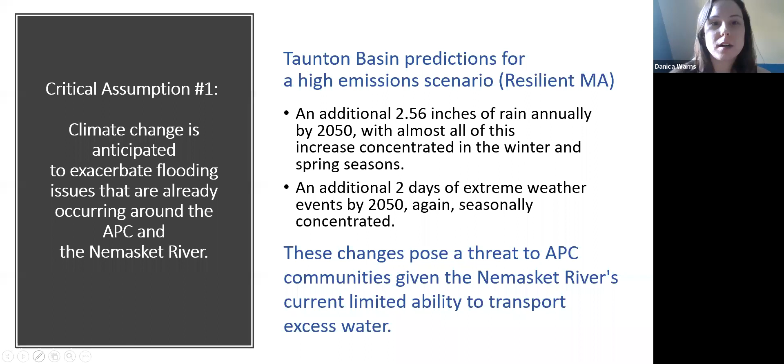So as we were developing this plan and working on prioritizing and advancing those projects that Michelle alluded to, we had a few assumptions in mind that were guiding our process as we were reviewing projects. And the first was that climate change is anticipated to exacerbate the flooding issues that are already occurring in and around the APC and the Nemasket River.

We used climate projections that we kept in mind as we were identifying solutions from Resilient MA, from their high emission scenario predictions for future climate. For the Taunton River Basin, those projections show an additional 2.56 inches of rain annually by the year 2050, with almost all of this increase concentrated in the winter and spring seasons. Plus, we're also likely to experience an additional 2 days of extreme weather events by the year 2050, and again this is expected to be seasonally concentrated.

And these changes pose a threat to APC communities, especially given the Nemasket River's current limited ability to transport excess water, which is exacerbating and will continue to exacerbate the flooding issues that we're already seeing.

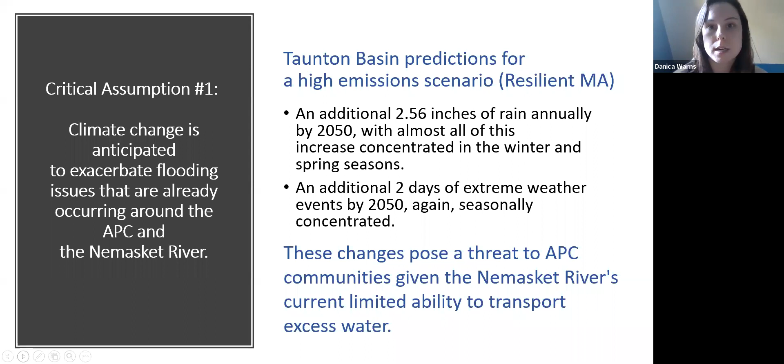The second assumption we had in mind as we went through this process was that the implementation of recommendations developed in previous plans has largely not yet materialized on the ground. There have been many studies of the APC over the years since the 1980s, and they have a great deal of historical knowledge and recommended solutions to a lot of these issues, but not many have been implemented to date.

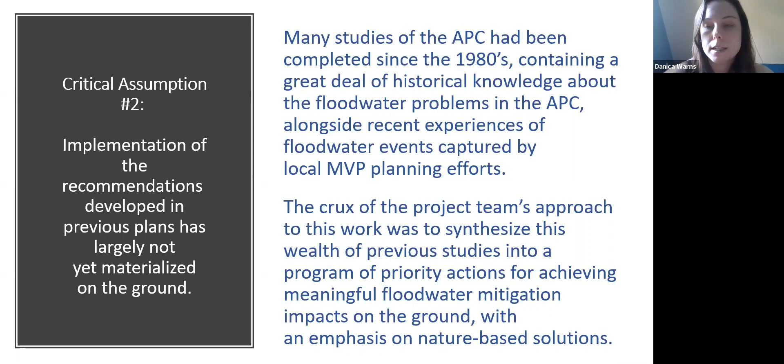So we really tapped into that existing knowledge set as well as more recent solutions identified in local MVP planning efforts. What we did for this project was synthesize this wealth of previous knowledge as well as the more recent knowledge, and tapped into the expertise of the Assawompset Pond community, who have a lot of that on-the-ground knowledge of what's currently going on. We used that to develop a program of priority actions for achieving meaningful floodwater mitigation impacts on the ground, and we looked through all of these with a lens of nature-based solutions. So next, please.

The final assumption we had in mind was that a holistic approach to floodwater management really includes combining both nature-based solutions, which we like to refer to as green infrastructure approaches, as well as traditional gray infrastructure approaches. You really have to have a good mix of both in order to have the greatest impact.

Now I'll tell you a little about the difference between those two solutions. Gray infrastructure, as I mentioned, are the more conventional engineered solutions that often come to mind when you think of infrastructure, like dams, stormwater pipes, and sediment traps. Often the approach with gray infrastructure is to capture stormwater and pipe it away from the source in order to be treated and dealt with far away.

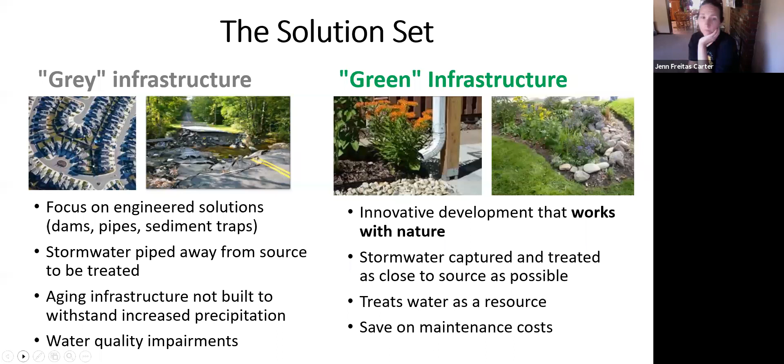Again, as I mentioned, for this project we really looked at a combination of both approaches that would have the greatest impact to reduce flooding across the watershed.

Nature-based solutions, as I mentioned earlier, really focus on green infrastructure—protecting nature and the services it provides, and as we develop and construct, incorporating these green infrastructure approaches into the way we do it. Nature-based solutions protect, restore, and/or manage an existing ecological system, or mimic those natural processes. They support public health and clean water, increase natural hazard resilience, and sequester carbon.

As I mentioned, you do that at three steps. Before development, you want to protect as much of what's there as possible. As you develop, you want to manage the existing processes through low impact development, which is another term for a way of developing that incorporates nature-based solutions and green infrastructure. And in already developed areas, you focus on restoring damaged and destroyed ecosystems.

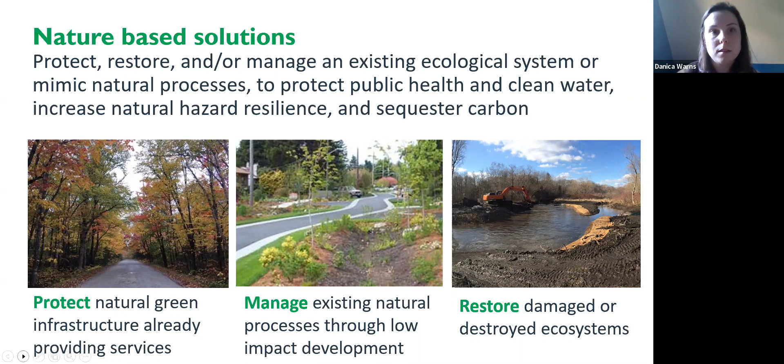In a lot of our work with communities, we found that most municipalities and communities in general are open to these types of green infrastructure and nature-based solutions. However, they're unintentionally discouraging them through local zoning, bylaws, and regulations, because a lot of local zoning bylaws require larger lots and are strict on dimensional requirements, which results in more impervious surfaces that prevent stormwater from going back into the ground.

I won't go into each of these too much because I want to make sure we have time to get to the projects, but in general, a lot of local zonings are not allowing or encouraging the more innovative approaches we really want to focus on if we want to use nature-based solutions.

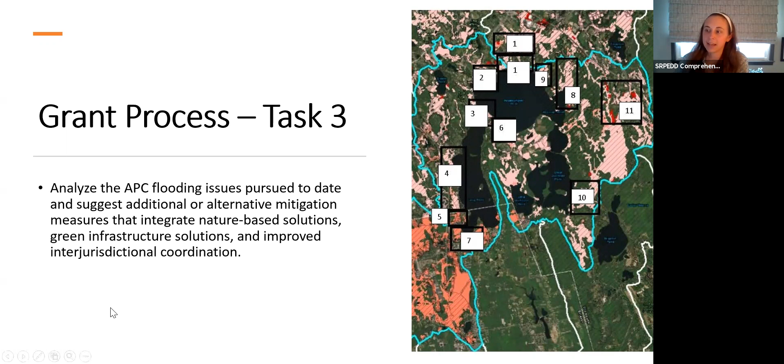As I've come to find out more as I do this work, you have a desired goal, say you want to improve a channel, but you have to do all this legwork in the back end to vet those solutions with the community, to study the feasibility, design and engineering. There are so many steps to many of these processes that we wanted to figure out where are all of these in that array of steps, and how do we get them to the next

tier of that ladder? So the final task involved thinking through estimated costs for some of the projects, preparing some permitting guide information, and really thinking through what steps you have to get through to reach implementation on the ground.

We were able to make progress on all 6 of the priority actions here. I wanted to note some general observations through the process. We quickly understood that while this grant deals with floodwater management, there really are so many other stakeholders and important issues in the APC and the Nemasket, including water quality issues, water supply issues, and herring habitat and fishery passage.

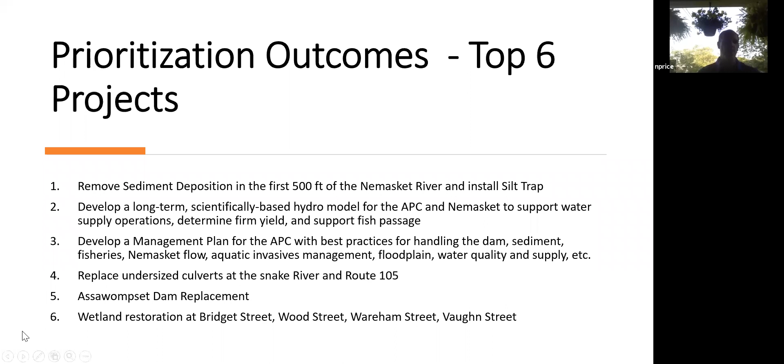The last group of projects are wetland restoration activities, and you see a handful of those highlighted, but many more were chosen. We'll talk about those later, but those few shown here were some of the highlights. So next, Helen, keep on going.

Excuse me for the loud motorcycles behind me, that happens here from time to time. Hold on... my summertime nemesis.

The modeling that I was discussing is broken into 2 real kinds. First off, the problem: we understood as we started looking at these projects that we lacked a big, large-scale, watershed-scale model to understand the hydrology of the whole entire system. This exists in other places in different formats.

One of the most common are groundwater models. The USGS has built these regional groundwater models for all of the Cape, for the Plymouth Carver Aquifer, for areas of Pembroke, and other places, but there's one lacking for here.

Something along the idea of a big groundwater model, or some other linked hydrologic model for the whole watershed, is needed to help evaluate how all of this can come into play. This is probably the biggest and most expensive undertaking we've talked about, so we've punted it down the line a bit and haven't made much specific progress. It's more of a longer term priority.

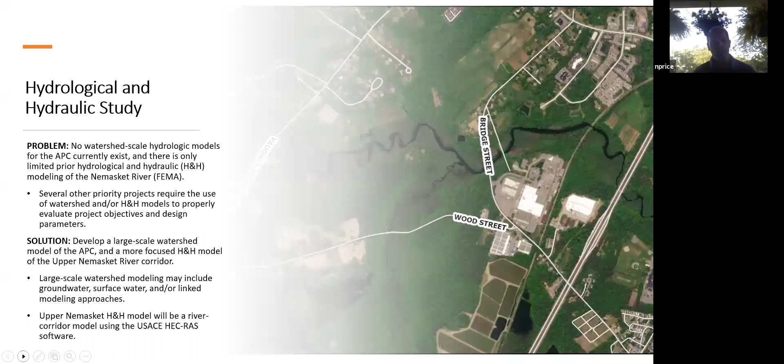So Helen, if you would please go to the next slide. A little more detail about this first phase of the H&H model for the Upper Nemasket: the components include a review of existing data beyond what we've already done so far.

One key thing is that there's an existing FEMA model of the river, but it's at a much larger scale and too low resolution to be of much value for our purposes. We'll figure out what's useful in there and adapt the new, more detailed model based off of that.

We'll collect a bunch of new field data, including the survey data we talked about, and data on hydrologic inputs, including rainfall, climate change factors, and pond levels that have been monitored for decades, to evaluate how we can run this model.

Once we have the existing conditions set, we'll identify various scenarios and projects we wish to learn more about, and run those models to understand the impacts, both positive and negative, of these projects. We'll make recommendations on which ones are worth doing, which might not be, and how the worthwhile ones can best be completed.

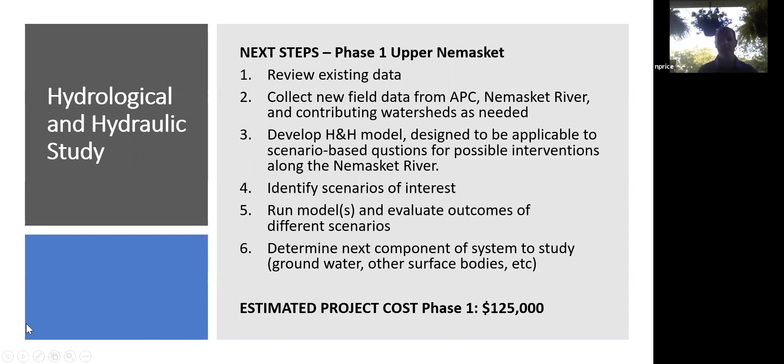The estimated cost for this, including both the modeling part we're responsible for and the surveying and other work going on right now by OPEC Engineering, is actually about $105,000, but we put $125,000 here in case something else gets added later on.

It's on a longer term planning horizon. We haven't really figured out exactly what the scale, what the methodology, what specific modeling type it would be, when it would be conducted, or where we might get money to fund this thing, because as you can see, it could be quite expensive. Our rough estimated cost ranges between 200 and 400 grand to do this properly.

But this could be useful for all the various purposes that Helen was talking about, for trying to evaluate things. The first phase stuff I was talking about earlier was really just for the Upper Nemasket River corridor. This could be useful for all sorts of projects anywhere within the watershed.

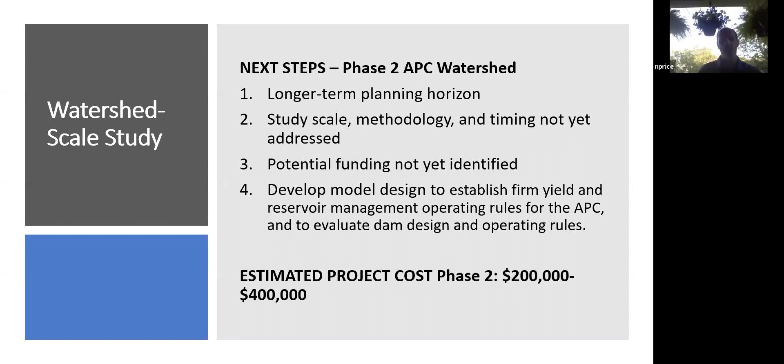The Nemasket sedimentation issue arose because a lot of people in the steering committee and in the general area are concerned about sedimentation in the reach shortly below the dam, for good reason. Proposals have been made throughout the years to do things like dredge, remove the sediment, and build a silt trap.

When we started looking at this, we realized it's great to see a need and try to identify a likely solution, but sometimes that likely solution isn't the best or most permittable one. So that's where the modeling we just finished talking about comes in. One big goal of that will be to help evaluate if this is the right way to go about it, and if so, how.

There's a lot going on here. The movement of sediment through this system is in some regards a natural process. However, by building the dam and by building this enlarged Nemasket River channel, we've changed the natural situation in such a way that we've created conflicts with how people like to use the system, and perhaps even how herring can migrate through it depending on water levels at different times.

Depending on how the modeling comes out, we can evaluate either doing this project and figuring out if it can be permitted, or perhaps there are some other options. Perhaps there are different channel designs that would better move sediment through the system to keep it flowing more freely under a wider range of flow conditions.

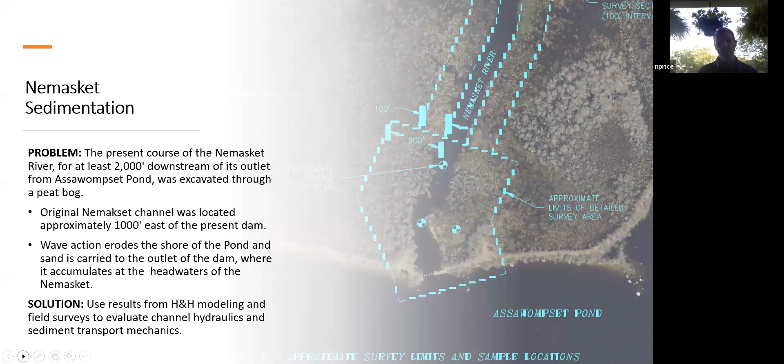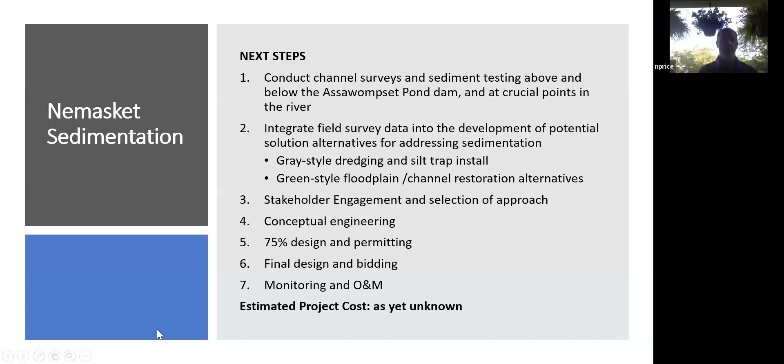Can we move to the next one, please? I think that's my last. Is Danica, are you taking this one, or Helen, are you up for here? I think I am. Yeah. Okay, option three, Neil. You're welcome, Bill, thank you.

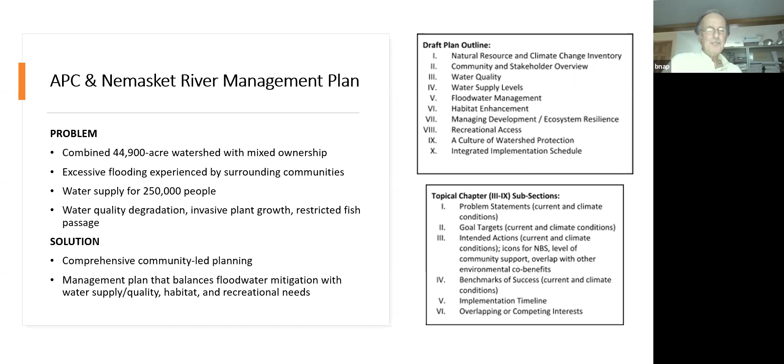We've had excessive flooding experienced in the community, especially everybody remembers 2010, and that's what triggered a lot of the current thinking on the Assawompset Ponds and what we should be doing to help, as far as the study goes and coming up with solutions. With all of the problems come water quality degradation, invasive plant growth, which the Herring Fisheries Commission has been dealing with, some of the Conservation Commission folks up in Middleborough have been dealing with, and restricted fish passage.

I know I've worked with the Division of Marine Fisheries before, and again, your Herring Fisheries Commission, they've been doing yeoman's work in both towns, Middleborough and Lakeville, for a number of years. They're kind of an under the radar group, but fabulous people, and it's been the same folks for a long time.

The restricted flow really impedes the herring, the juvenile, returning to the sea. The herring run here has been prolific for years, so successful that they've seeded populations in other states. It's a shame that the river itself is becoming an impairment to a natural process, and many natural processes, like some of the stuff Neil and Danica were talking about before. So that's the real value of a Nemasket River management plan.

If you look on the right-hand side here, this is a draft plan outline. It's pretty much standard procedure, the type of plan that the EPA looks at for a watershed management plan. We're probably going to be working within these parameters. But the whole nature of the Assawompset Ponds project to date has been to plan with people, not at people. So there's going to be a lot of wiggle room in each of these areas.

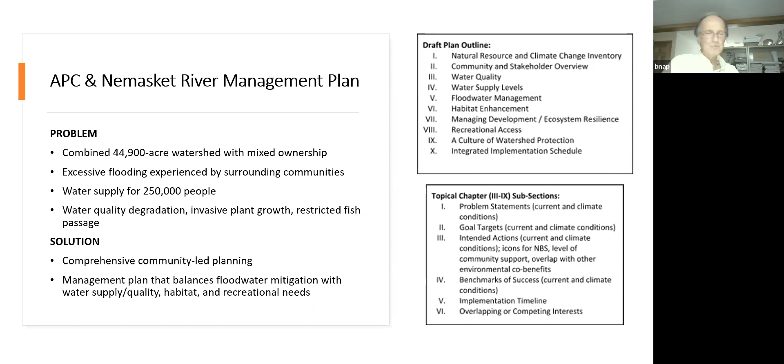It's respective of the water suppliers, the fishery, the natural resources, and the residents around the pond. So these are the things we're going to be doing. This is what it's all about, a management plan, and it balances everything. I think Helen said before, we're looking for balance. And right now, what have we done?

This is another one of those projects where in 6 months we've made unbelievable progress. We've applied to the MVP Action Grant Program with the state, the Municipal Vulnerability Preparedness Program, working with 4 of the communities around the ponds to put together MVP plans. Just last week we put in for an action grant proposal for $100,000, and we've already secured match thanks to one of our partners, the Nature Conservancy. So hopefully we're keeping our fingers crossed that this could let us hit the ground running in the summer and start on the management plan.

Again, it's going to be inclusive. It always has to be inclusive, or it's not a plan. We're going to research, collect data, do analysis, go back and revisit some of the stuff, look at land use and regulatory parameters, do the reviews, draft a watershed management plan, and then do periodic updates.

We've seen plans going back through the review process here that were prepared and sat on shelves, some for 20, 30, 40 years. If they're not updated, people don't know about them. You have to keep plans in the public eye to keep them alive, and that's been the whole thing with my process here. These plans have now seen the light of day. They're on a project page and they're going to be alive. The committee is going to breathe life into the plan, and hopefully the generations to come will carry out the recommendations of the plan.

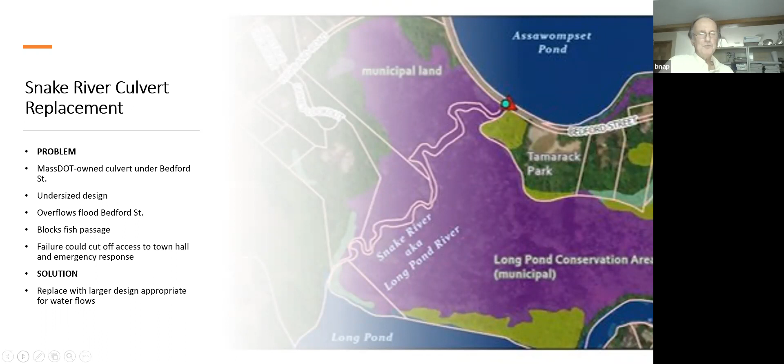If you look at it, just to facilitate the exchange of the river and the pond, you need a bigger culvert. So that's what we're looking for right now. We're going to be looking at the Mass DOT owned culvert, and I'm working with District 5. We're going to look at the design, the overflows, and what floods on Bedford Street. It got taken out pretty much during the 2010 rains, everybody remembers. But periodically when we have high rains, it'll overtop.

So what we're doing right now is we're going to file a notice of intent with Lakeville Conservation Commission. I am working on getting a state highway access permit from Mass DOT, and I'm working with Andrea Coates from Mass DOT District 5, the environmental person. Hopefully when we do this, we can do a field assessment and work to determine design specifications, work to get some money and engineer a culvert design, go through the permitting, and then hopefully remove the culvert and drop one in.

The estimated project cost would be about $275,000 to $600,000. That's engineering, design, permitting, construction. Hopefully we can work with our state partners. Working with the Division of Ecological Restoration, having them as a partner in this process is another advantage we have, because this is the business they're in. I've worked with them in other places to do culvert design, removal, repair, but also dam removals. Again, DER is a very valuable partner in all this, even just for advice, sage advice.

Next one's the Assawompset Pond Dam repair. I've had conversations as recently as a half an hour before we went on the air about the dam repair. It's old. At one time it was classified as a high hazard dam. It's now classified as a low hazard dam, but there's still things about the dam that don't quite work right. It's a little bit inefficient. The spillway isn't probably functioning properly. The fish ladder isn't what it could be.

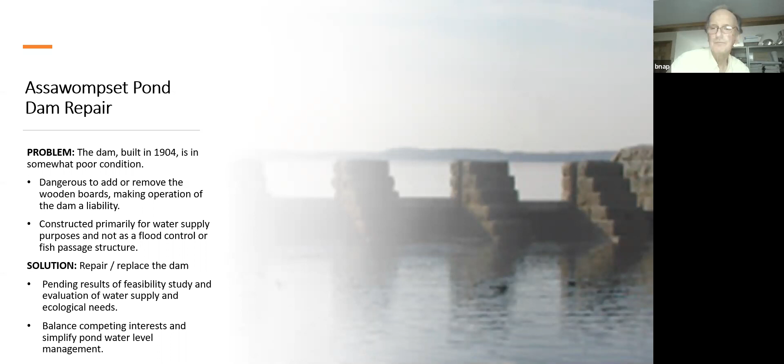Next slide. So again, these are the things we have to do. We want to conduct the feasibility study. I've spoken to people already about funding—we're trying to get out ahead of these projects. I think if we can come up with a feasibility study and a permitting pathway, it will help us eventually apply for dam repair and replacement money. I've got a couple of sources I'm talking to right now.

We want to evaluate the dam—the ecological needs, the physical needs—conduct an assessment and field work, look at the specs, and do some preliminary conceptual engineering and design, getting it up to 75% design and permitting. Once you do the final design, you put out a bid package and come up with an engineering consulting or engineering build firm, and then you get into the dam construction.

Now, the important thing to remember is the water suppliers are there—New Bedford—but Taunton is the owner of the dam. So working with the city of Taunton and the water superintendent and water department will be critical. I think one of the great things here is the strength and multidisciplinary approach of the project, and all the projects we've discussed previously will really help the city of Taunton come up with solutions for this dam and how they want to approach repair, replacement, or whatever we choose.

And after that, you're going to have to come up with a monitoring and O&M plan—operation and maintenance. And the costs, we've kicked it around. We've been high, we've been low, but it seems as though it's going to be about $1 million to $3 million.

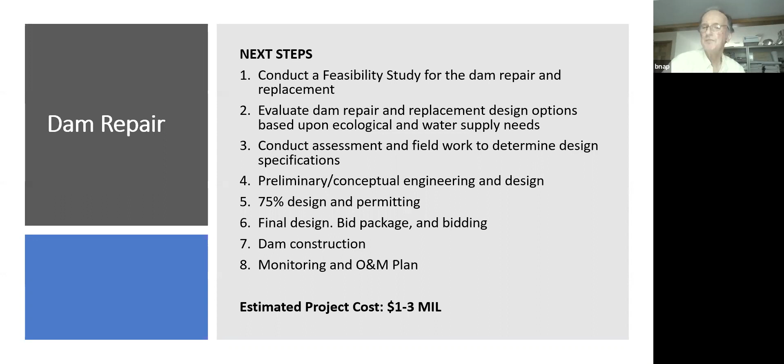And I'm going to kick it over to Eric and Sarah for the wetlands restoration. All right, thanks Bill, I'll kick us off. Eric, you just jump in if you want to add anything.

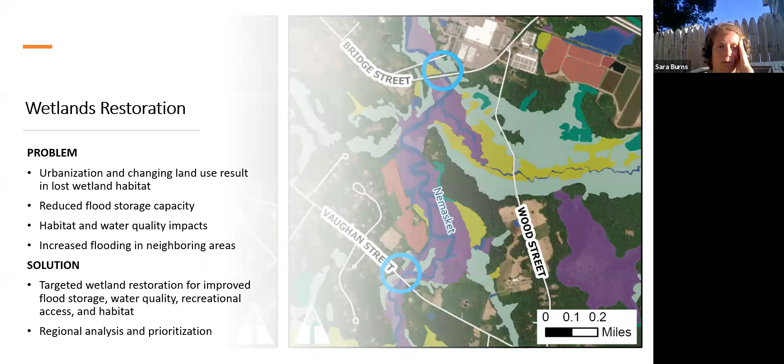Eric did some GIS work to look at all these opportunities according to some modeling that's been done. Then we worked with the steering committee to explore the opportunities that this model picked up, to figure out which areas might actually be feasible to either restore or manage as wetlands.

This is the next steps slide. We've started down the path of this wetlands restoration analysis. I'm not going to go super nerdy on the details, but we're looking for areas that are very likely to be able to be wetlands again, and within that subset, looking for ones that could really help with flood storage and water quality.

We did the first screen of looking at the potential sites with the steering committee, and we did that as a Zoom meeting, so we just clicked around the images of the maps. Those are the two next steps that are kind of underway.

From there, the next steps that have yet to be done are to pick some of the most promising sites from our desktop or computer screening and actually go out and take a look at them, see what they're like and what the soils are like. Soils can tell you if they used to be a wetland and if they could be a wetland again, and we can look for plant communities that indicate that as well.

This framework that we use to look for opportunities has been used in the Mill River watershed, also within the Taunton River watershed, and many of the sites we visited were turning themselves back into wetlands, which is great.

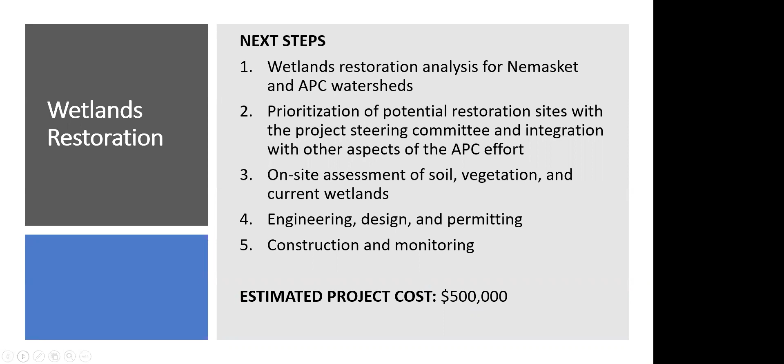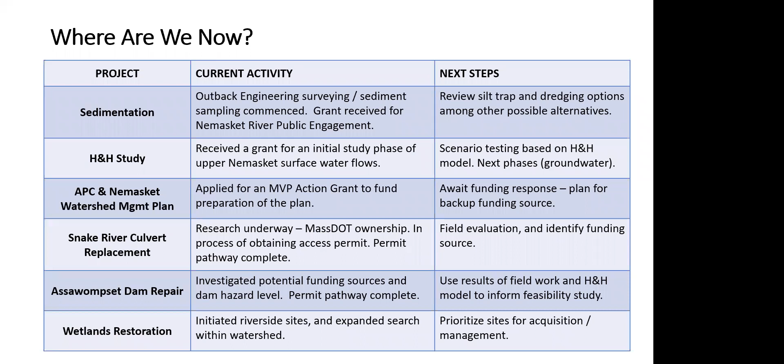We've been reviewing these 6 priority projects through the lens of what's already going on and what the next steps are. To summarize, the first one was the sedimentation issue in the Upper Nemasket, and the Bill and Herring Commission have worked to get funds in place to have Outback Engineering out in the river. It's an active project going on now. They're surveying and looking at what's in the bottom of the river and doing sediment sampling.

There's also been a grant received to engage the public about the Nemasket River and the potential next steps. So once the survey work and sediment sampling is done and we get a sense of what's going on there, we can review both the gray solutions of silt trap and dredging, and also explore some of the green solutions that Neil and I and others have talked about.

So that's that one. For the H&H study, as Neil mentioned, we do have a grant that has been announced, and we're working on getting that contract up and running to start looking at how the water is moving through the Upper Nemasket from the outlet of the pond. From that work, the next steps are to start testing possible scenarios based on what we learn about how the water moves during different rain events and things like that.